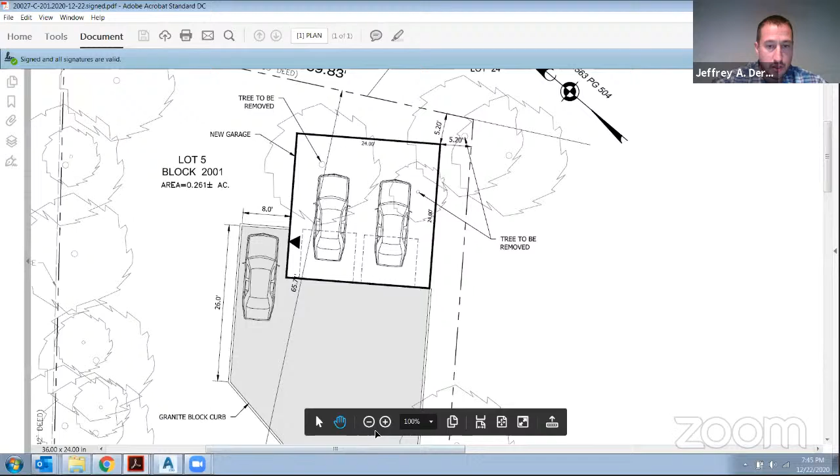Okay, please go ahead. Chris, do you want me to share my screen for the exhibits? Yeah, if you have them ready, go ahead. Okay, so we have, let me just - can everyone see that? Yeah. Okay, can you get started? Yeah, I clicked the button, it says I'm screen sharing, but I don't see. Do you see? Right now it's black. I see your cursor is moving, but that's it. Okay, so I have two exhibits. The first exhibit A1 is revised plans that address some of the board comments that were provided. Primarily I'll be speaking to two sheets, C201, which is sheet 2 of 3, and sheet 301, which is sheet 3 of 3. The first one's the layout plan, the second one's the grading plan, as well as photographs taken by me, put into a package. These were taken on November 2nd of this year. Okay, and is it okay to refer to Google Maps as well?

Yeah, if it's not marked, you'll have to send it. I mean, that's just on the internet. I could take a screenshot and send it.

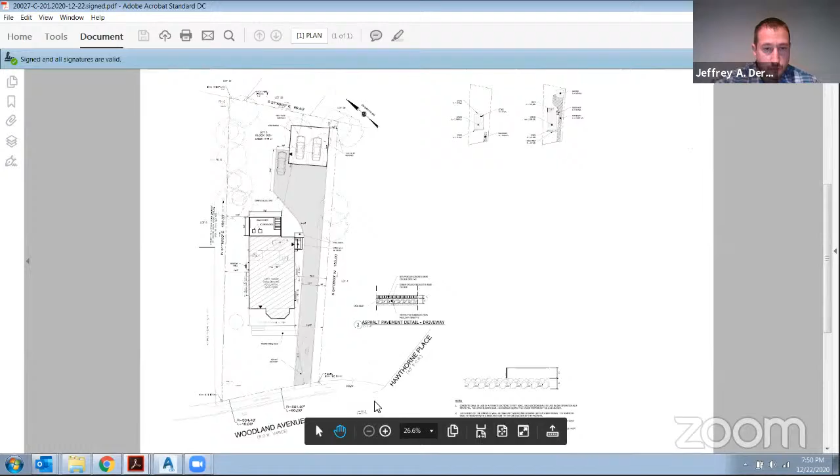We have a table of the zoning analysis up here to the right, which I'll refer to for some of the numbers, and look at the plan view. So the existing house is situated here. We're proposing to remove the stairway, which you can see right here, and the addition that's off the back of the house here.

To square up that house, there'll be an addition that comes off the back with a deck. There'll be an entrance that used to come here, it'll come out the side, with a new driveway down the right side of the house to a detached garage, consistent with some of the neighboring properties in this part of the community. For a lot that is narrow like this, there's no room to have a garage in the back, unless you were to tuck it in real close.

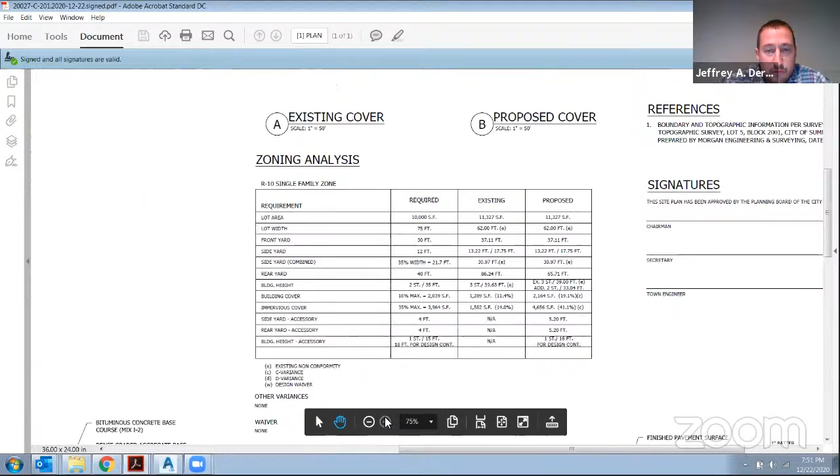The variances that we're looking for: the existing lot width is 62 feet, where 75 feet is required. The existing house structure is 39.63 feet tall from the average grade plane, where 35 feet is allowed.

We are actually going to modify the grading along the sides of the house. As the house gets longer, we're going to smooth out the driveway, and it's going to bring the average grade up. We're actually going to improve that condition by about 7.5 inches, so we're going to reduce the building height to 39 feet.

It should be noted that the addition is not a 3-story addition, it's only a 2-story addition. And the existing 3 stories is also an existing nonconformity, where 2 is allowed.

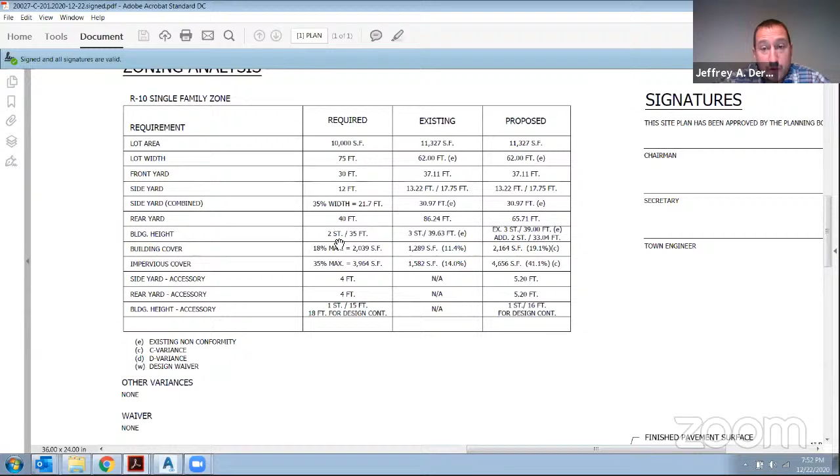The building cover and the impervious cover both have variances. The building cover, we are proposing 19.1%, where 18% is allowed. I'd like to point out that one of the comments from the zoning officer had a different number here - she included the deck.

The definition of building coverage in the ordinance states that all covered structures and structures with a roof are considered buildings. And after that, it says if a deck has a roof, it would be part of the building coverage. But in this case, the deck does not have a roof, so it's our opinion that the deck is not included as building coverage.

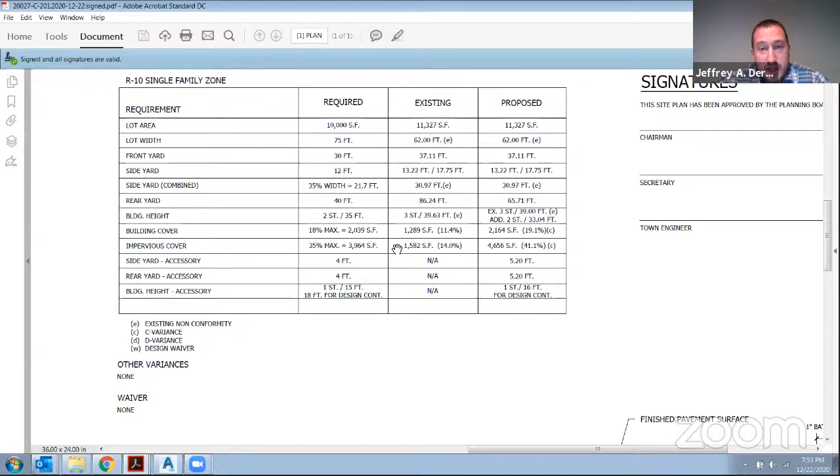The impervious coverage is 41.1%, where 35% is allowed. This is driven partly because of the turnaround requirements and the position of the garage.

So the garage is positioned in the back right corner. It meets the setbacks for accessory structures, and the driveway as it comes past the house is maintained at a minimum width of 10 feet, and then it flares out to allow access for the 2 cars into the garage.

Because the Zahn family has more than 2 cars, we anticipate there being a car parked in the driveway itself. So we provided an area where they could pull that car around the side of the garage and allow cars to turn around in this area. It's 32 feet from this edge to this edge, which is enough room to do a K-turn and be able to get the car out to the street so that you're pulling out face first.

At this point, I would like to go through the professional reports and touch on a few of the comments that were provided. I'll leave the plans up.

So we already talked about the variances. In the zoning officer's report, there was some different numbers presented than what we have here. There was a correction when the grade plane calculation was done - a spot shot that was typed wrong, and that threw the calculation off. So that's been corrected on this plan, and that's why the numbers I'm presenting and testifying to tonight are slightly different than what was in the report.

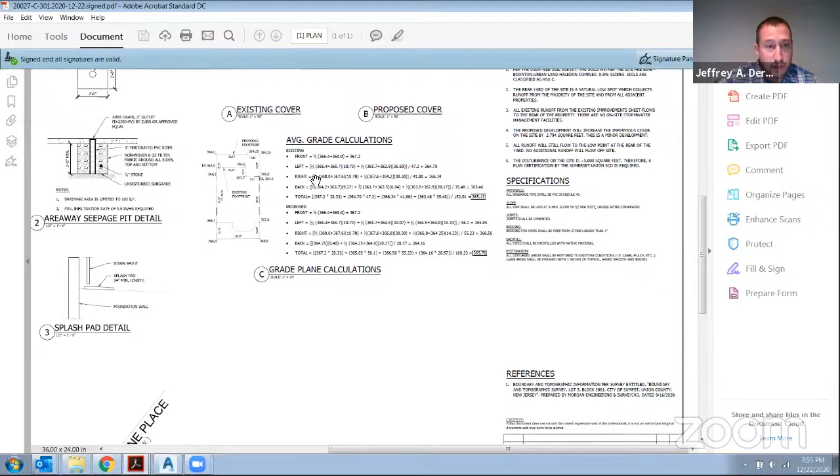These are the grade plane calculations that are here. I know there was a comment looking for them - they were on the plans. We've already talked about the coverages.

There was a comment on building height having a maximum of 40 feet. I could not find that in the code, so I would ask if the zoning officer could point us to that spot. If there's a variance for building height, it would be to the existing non-conforming ridge of the roof. The addition is well below the building height, and I'll let the architect show you the elevation and speak to that.

I believe a survey was provided in the package. So I think I'm on the engineer's comments right now, number 6. There was a comment regarding the neighbor's fence being 3 feet or 3.3 feet, which is 4 inches into the adjacent property, which is appropriate because it is the neighbor's fence.

Comment number 12 asked about a generator. My understanding is the owner does not intend to put a generator.

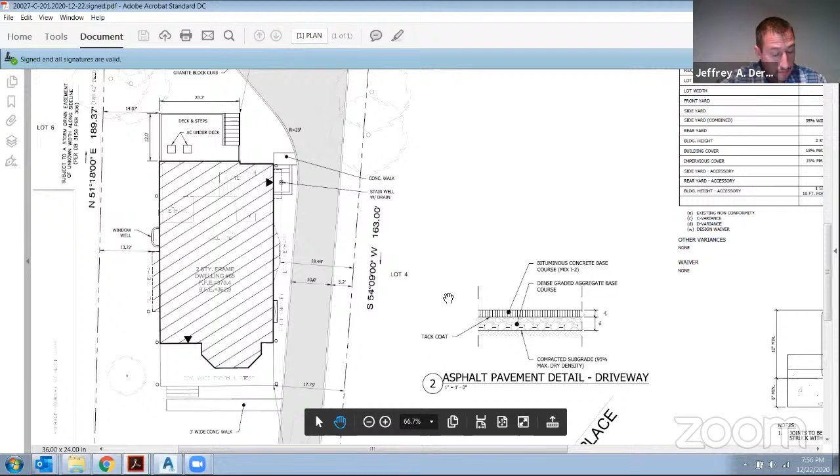Comment number 13 was discussing trees and any potential landscaping. We are going to be removing 2 trees, one in this location - this is a very small tree - and there's one on the corner here, and that's to make room for the garage.

I understand that if any trees over 16 inches would require a permit. I do believe an approval of a site plan would constitute a permit, but I'll let your attorney clarify that.

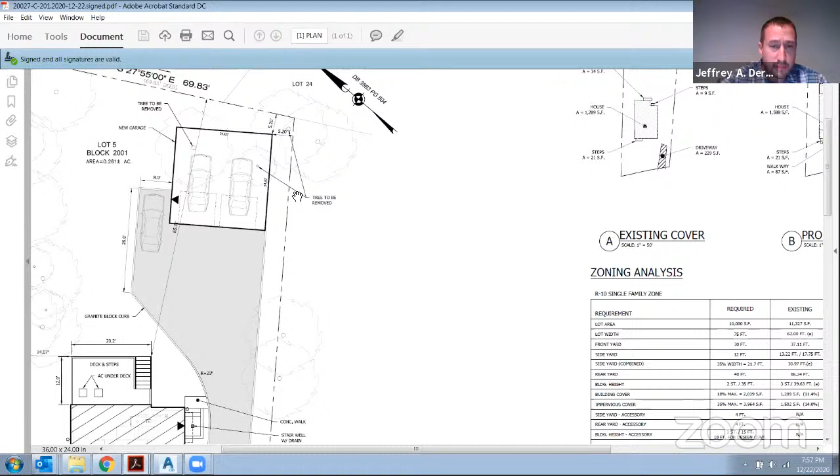The forester also provided some comments on landscaping. The owner does intend to provide landscaping at some point in the front and such. As far as any screening, the ordinance does not require screening from residential properties to residential.

Where the garage is, we're within 5 feet of the property line on this side, so putting screening there would just have trees that end up growing in and potentially damage the structure. They're also situated under an area with existing trees, so they probably wouldn't grow. I'm going to actually switch over back to a photograph.

The other discussion was on screening along the driveway. At this point, we don't intend to provide any. We feel it would enclose the property, and if you look through the neighborhood, there's a lot of instances where there's no screening. As I stated, the ordinance does not require screening residential to residential.

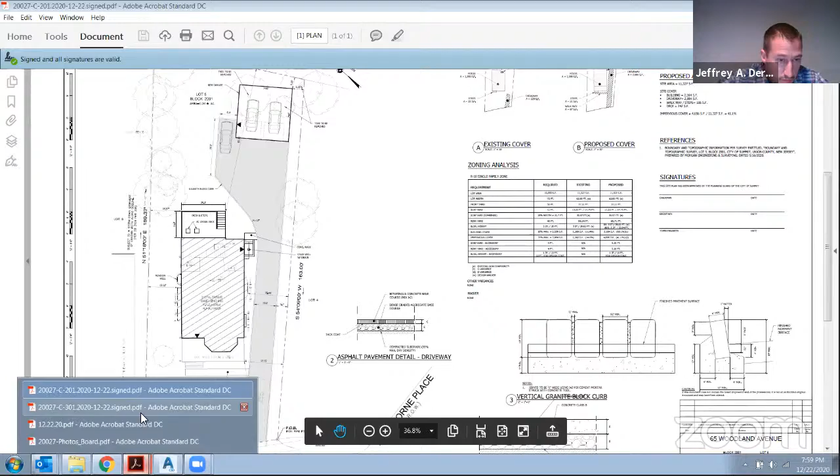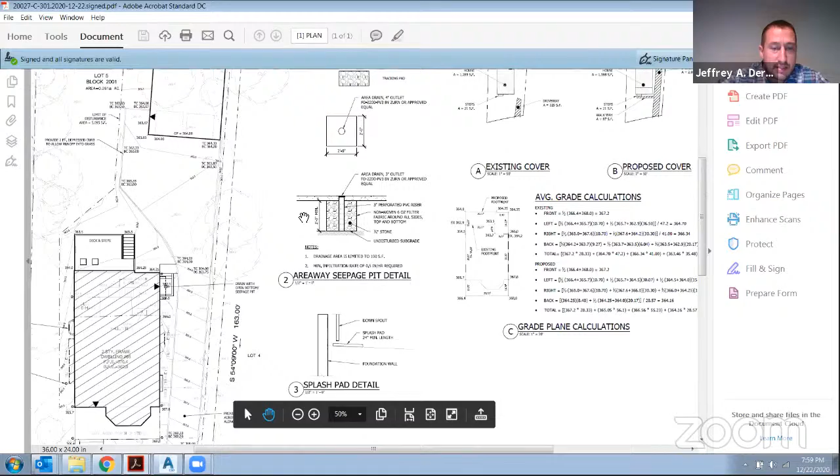On the grading plan, I've provided a stormwater management analysis over in this area. We are increasing the impervious cover on the lot by 2,794 square feet. And this property is unique in a sense because of the basin and the bowl that's basically formed by the backyard and the adjacent properties up around here.

So in the existing condition, roof runoff discharges from the roof leaders along the side here, and they're labeled as typical and shown on this plan. We intend to just maintain that existing pattern.

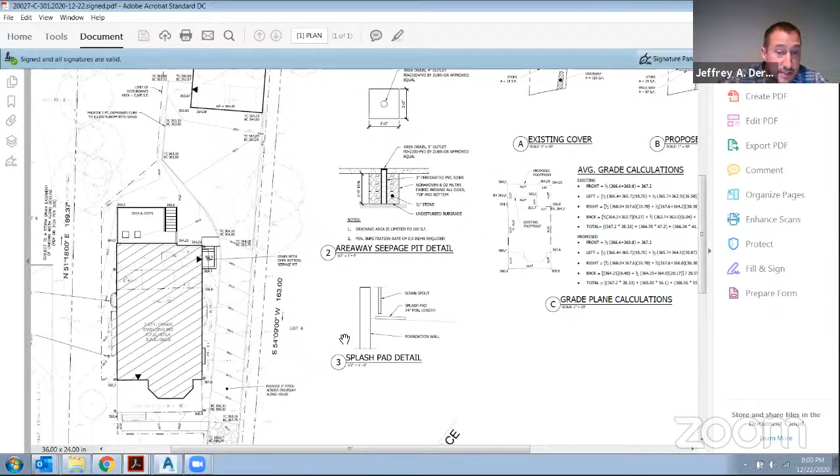The roof runoff is going to come down to the back. Here it's going to slope down to the driveway and work its way down to this low point in front of the garage, and then go out and work its way back into this area. Any runoff that comes down from the existing neighbor will work its way down along here and would be able to get directed around the back of the garage.

We've set the garage up a little bit above the existing grade. So in the existing condition, there's no runoff that actually leaves this property, and in the proposed condition, there's no runoff that actually leaves this property. Therefore, the design is in compliance with the standards.

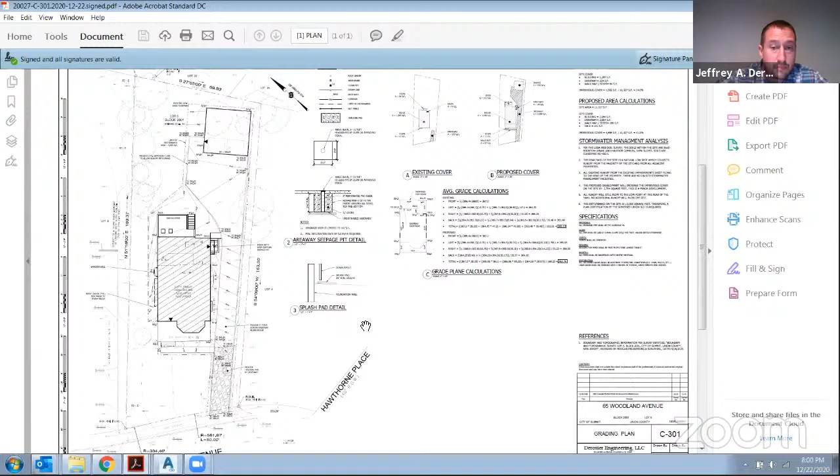I believe that concludes my testimony for now. Great, thank you. Mr. Ball, can you clarify the D6 variance? I know we had questions about that.

Yeah, I wanted to jump in on a couple things because there were a few points in the testimony. One was the definition of building area, building coverage, and whether that includes the deck. The definition under your DROs is that horizontal plan projection of all covered or roofed areas on a lot, whether permanent or temporary, including decks, and it goes on. It doesn't have to be covered and roofed. A deck would cover an area. So I think Krista's calculation, including that deck area within the building area, was the correct one.

If the board was going to be considering the variance here, we should use that increased building area number just to be sure it's entirely covered. As far as the height increase, there was an additional email today asking about that. The height of the addition is still more than 10%, so it triggers the D6 variance that would still be required, even though it's lower than the remainder of the house. It still would come in, and the board should again consider this as a D6 as to that aspect of the application. Thank you, Mr. Paul.

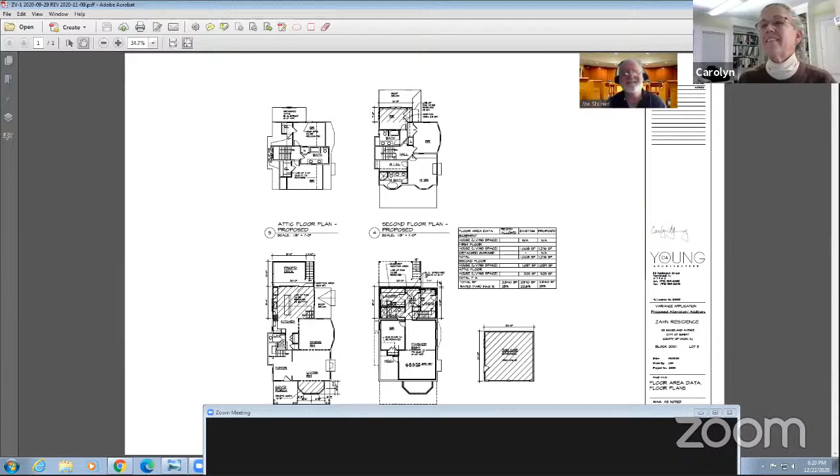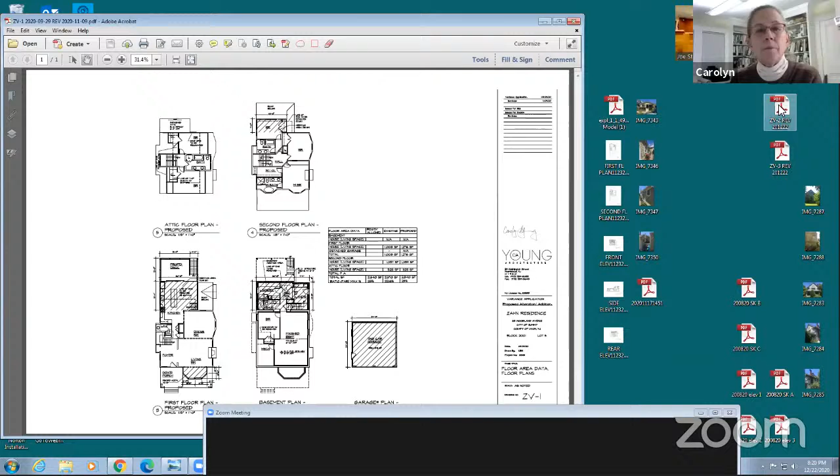There are three drawings that we have prepared: ZV1, ZV2, and ZV3. We're not seeing anything yet. Here we go. You see that now? You have a black screen in front of it. All right, hold on. Now you have me in front of that. I know. All right, move me over. That's it, a little further over to your left. To the other way, get in the middle there and then drag it. Okay, all right, there you go. ZV2, so we have it, and ZV3. Okay.

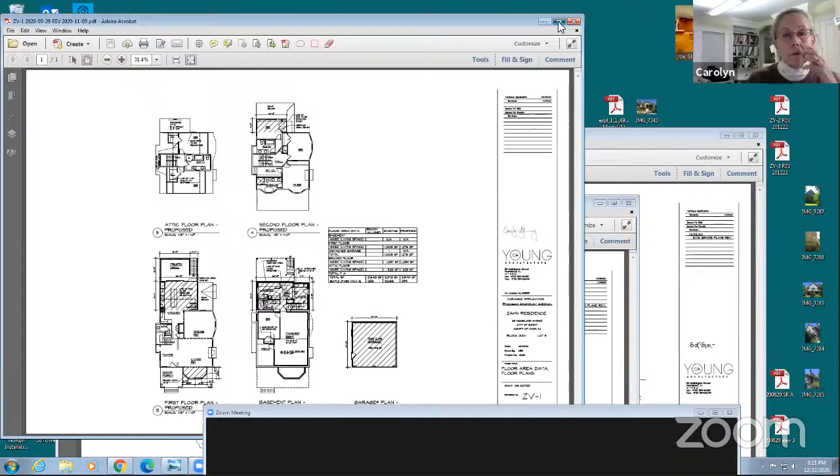So on ZV1, we are showing you the proposed plans. The hatched areas that you see are the proposed renovation, the proposed addition. We're actually removing an existing two-story addition that was done at some date to the back of the house, and we're constructing a new addition. It's comprised of a basement level, which is illustrated here, a first floor level, which is primarily kitchen and breakfast area, along with a bump out on the front of the house, which is under the covered porch.

On the second floor of the house, we're bumping out to the back in order to create a better bedroom and better bathroom configuration. We're doing other renovations as well, like creating a master bathroom.

You'll notice that the attic floor plan, which is the existing attic and the non-conforming third floor, shows we are not doing any additions to that level. Nothing is hatched, there's no addition. The two-story addition has roof on top to the back of the house, but it is not accessible space, it's below the height that would make it any kind of story. The only modification to the existing third floor is the relocation of a window, which is allowed in your ordinance as long as we're not adding windows.

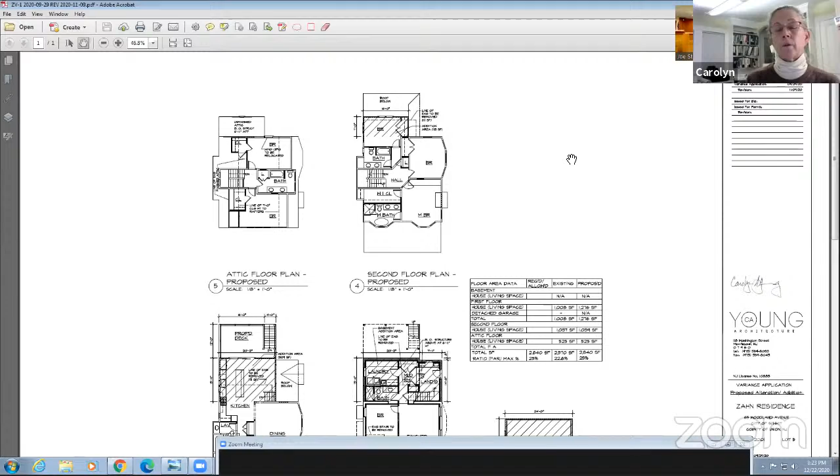So ZV2 — actually I'll go to ZV3 first. On ZV3, we also have some photographs at the top of the page, similar to ones you've seen so far, except taken earlier in the fall because the lawn was actually green.

We are talking about this existing house, which is 3 stories with the height of the ridge exceeding the 35-foot limit, at 39.63, which we keep talking about. That is existing, it is not changing. The back of the house, which we've also seen other images of, you can see the ridge of the house, which again is the existing condition.

You see this small bump out, which I referenced when we looked at the floor plans, that we're tearing off in order to add our addition. This third photo is similar to what Jeff showed because it's showing the right back corner of the property where we're proposing the detached garage.

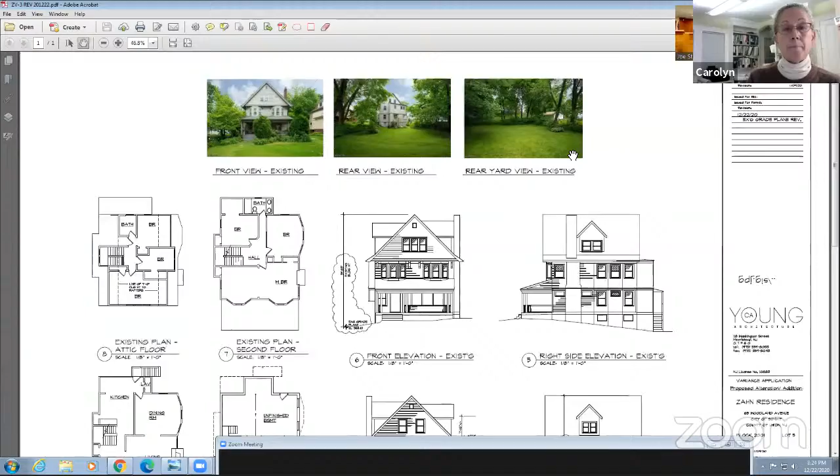The rest of this page shows the existing floor plans of the house and the existing elevations. The front elevation and rear elevation are graphics of what we just saw in photographs, along with the side elevations. This is illustrating the existing condition. The height we keep talking about is identified here on each drawing. I don't think I need to go through the existing floor plans, but they're there for reference and any questions you may have.

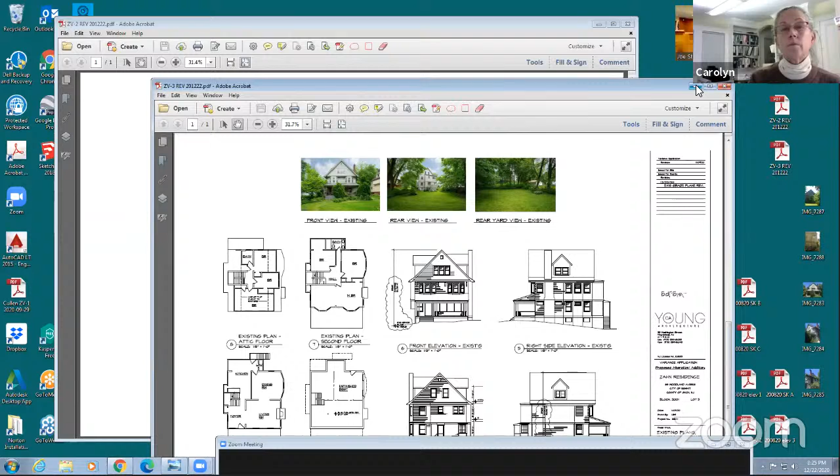So ZV2 is the drawing that discusses the proposed elevations of the house. Here we see the front elevation, and the bump out I discussed in plan to extend the size of the living room. Again, we see the front elevation with nothing else being changed or impacted. Obviously we're changing windows and updating elements of the house, but nothing architecturally is changing except for that bay, which is underneath the existing porch.

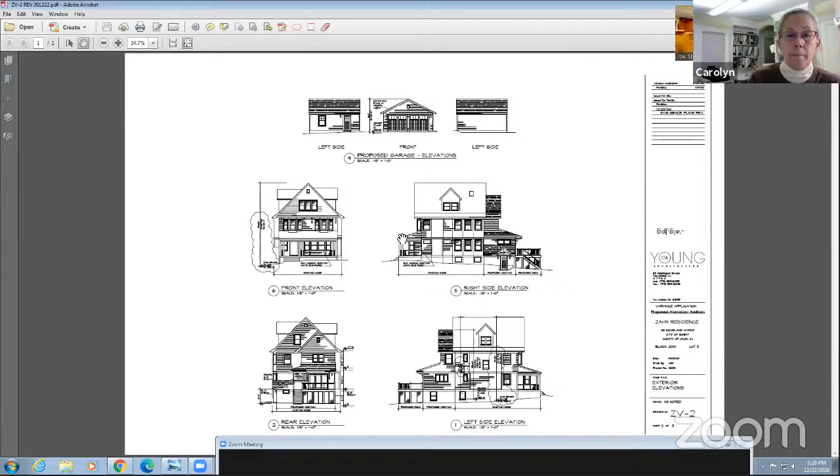I'll take us to this view because it's bigger. This is the right side of the house, where the driveway is going to be located, coming down the side of the house. This line is where the existing 3-story house ends, and this is our proposed addition, which is basement, 1st floor, 2nd floor with the roof. This is the deck to the rear.

The question that was just asked about the height of the deck — it's about 6 feet above the finished grade. We can discuss that in comments.

Here's the rear elevation of the house. The existing house is here beyond, and the addition is this area. We have the basement level, the deck here, the 1st floor, the 2nd floor, and the roof that covers the 2-story addition, which is not a 3rd floor or even usable attic space — it is just roof.

And this is the other side elevation. Once again, all the same comments apply. The end of the existing house, the heights indicated here, where the average height — let me zoom into this one for us.

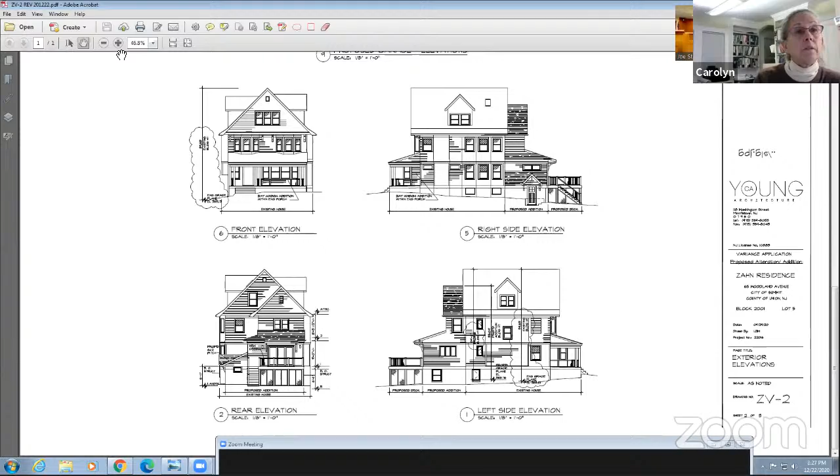The average grade currently is 365.13, which creates an existing building height of 39.63. The proposed average grade is 365.76, which creates a new proposed building height of the existing building only of 39 feet 0 inches. So we have an actual reduction in the existing 3-story house's overall height from 39.63 to 39 feet.

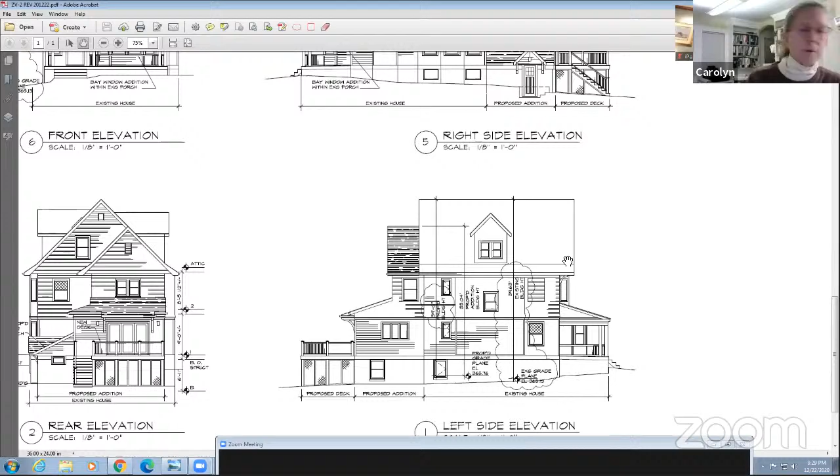The addition, which you see back here from the proposed average grade plane, will be 33.04 feet, which is less than 35 feet, and it does comply with the 35-foot height in your ordinance. I think there's been some confusion about that — not quite clear from what Mr. Ball said before, if that was his understanding or not.

I think that walks you through the drawings and hopefully identifies the design for you. There were some comments, not too many architectural comments in the review. We will be complying with smoke detectors, egress windows, and all those types of things that were in the reports. That will of course be done when we get to the construction drawings of the project.

I think, in summary, the design and the proposed improvements are beneficial and allow for this rather stately old home to continue to be part of the architectural fabric of downtown Summit.

What we are doing architecturally is trying to be sensitive to the original building, to improve the aesthetics, although most of it is happening to the back of the property. But for the homeowner's sake, we want to aesthetically improve it.

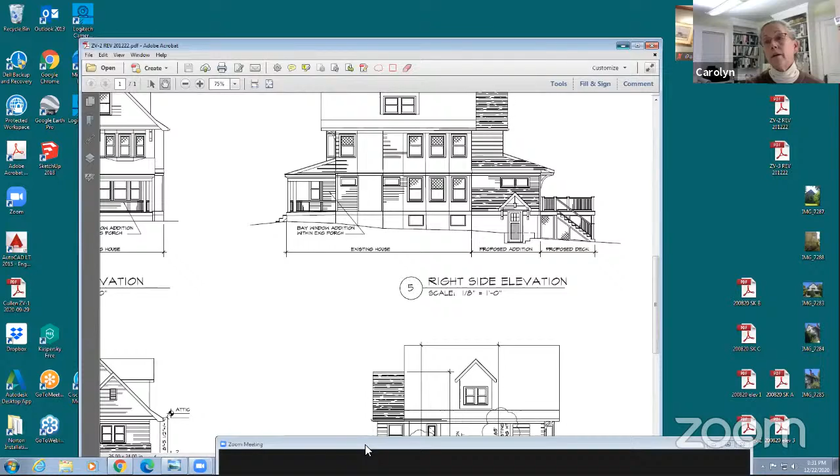So, I hope that worked. Thank you.

Are you complete? I'm complete. Okay, great. Any questions from the board? Give me a minute to get back to the group view. How do I do that? Oh, there you go. Okay. Thank you. You're welcome. Any questions from the board?

I'd like to jump in just so we could get clarification of the calculations for the height of this addition. I'm looking back at the notes from Krista, and at the communications from the engineer, and I want to be sure everyone's on the same page. Can you confirm what the existing grade plane elevation is, and the resulting building height of that particular addition?

Yes, I'm happy to try to clarify this, because it was a little confusing to all of us at first. And it's even a little more confusing because, as Jeff said, he had a number that got flipped around. So my drawings have bubbles on them.

I didn't really specify to that point, but I have bubbled what has been revised from the drawings that Krista saw. So, the existing house is 3 stories. The grade plane is calculated at 365.13 for the existing house.

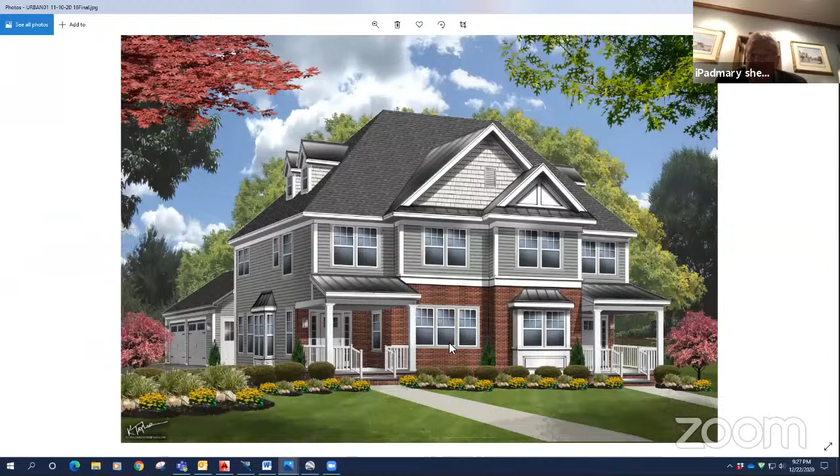Can you see my screen? Yes. Okay, so this is the unit. We did two renderings. This is the unit on the corner lot, which is lot 16.01. And then I also have the rendering for the lot, what's being called 17.01. And it's very similar to... I'm sorry, I just messed that up, didn't I? Let me go back. I got the same one. Nope, not that one.

I'm sorry, just give me one second to get the rendering up. Okay, I'm sorry. This is lot 17.01, and this will also be similar to lot 15.01, except it will be mirrored, a mirror image of this. So A7 is the rendering of lot 16.01, and A8 is the rendering of 17.01, so we keep the evidence straight, correct? Mr. Szymczak? Yes, that's correct.

All right, Mr. Alberti, let's go back to your question. Did you commission a rendered elevation of the proposed lot 16, the corner lot, for presentation this evening? And I'll add lot 17, proposed lot 17.01, and ask whether these are the renderings of the buildings you are seeking approval to construct. Yes, sir. These are the renderings that were coordinated with our architect of record and were approved by us as ownership as our intended development.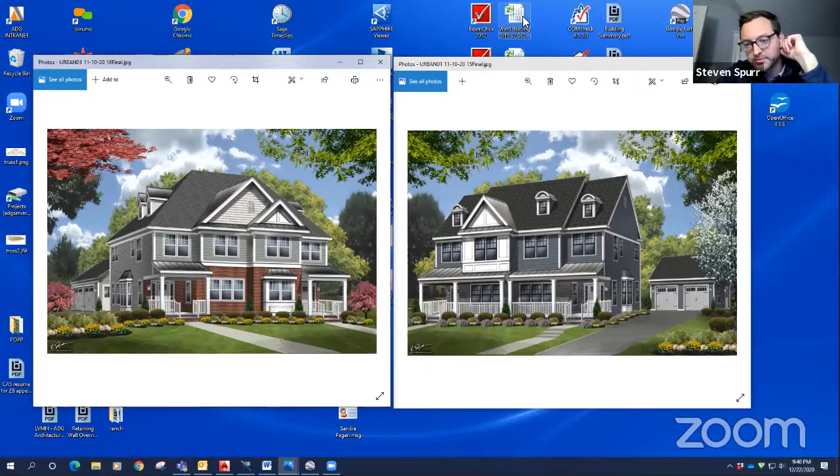Thank you, Mr. Sheehan. First, any questions from our board professionals, Mr. Dower, Mr. Snickes, understanding this is not necessarily a professional witness, but a representative of ownership? I have no questions at this time.

Chairman, Ed Snickes from Burgess. Can you hear me okay? Yes, I can hear you. Okay, thank you, I just wanted two quick questions. One, I didn't hear, I'm sorry, if you were going to change the roof line as Krista Anderson had identified. Yes, sir, we can meet the 6-on-12 standard that she had proposed in her review.

Okay. And then also, with regard to the building sizes themselves, you may have identified your process in identifying the actual units and their sizes. And I noted that you have separate detached garages, and I know that's been identified as some of the driver for the impervious coverage. What was your rationale for that compared to attached to the buildings?

Yes, so when we were first looking at the development, we initially thought about having the garage attached to the dwelling and even be something where you drive in and are partially below grade, incorporated in somewhat of a basement plan. But we realized that it took away a lot of the living space, and so much of life now is confined to your home that we wanted to maximize that living space and also have the garage as much as possible tucked behind the property so it wasn't a prominent feature for a vehicle, as much as it was celebrating the new homes people will be moving into.

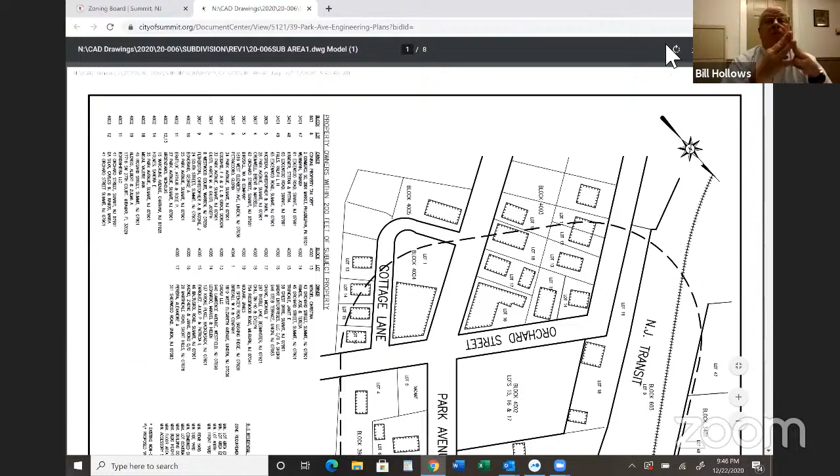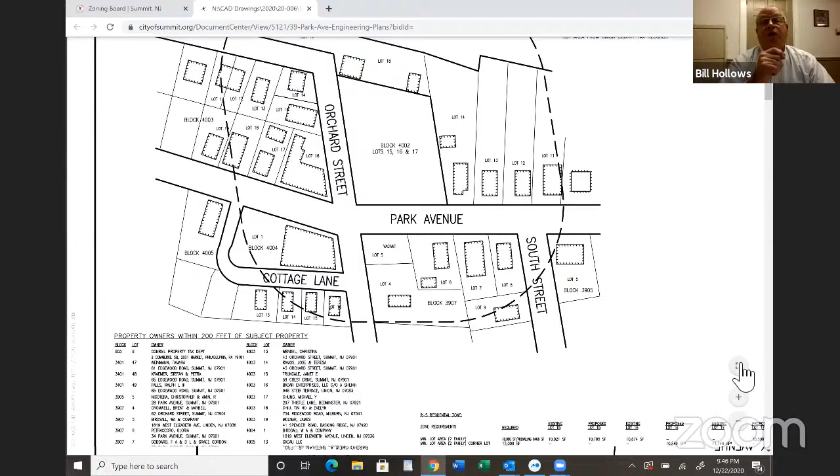There we go. Just kind of the background, the property is located at the corner of Park Avenue and Orchard Street. It consists of 3 lots, presently 15, 16, and 17. We don't show them on this area map, but I have an exhibit where you can see those. Presently, the lot is vacant, but previous to when we did the survey in the spring, there were structures on there, and I have an exhibit to show that. But I just want to give you kind of an overview of where you are.

So the top of the drawing is the NJ Transit Railroad. To the right of the subject property is a residential area, and both sides of Park Avenue, a residential area with a mix of single-family homes and multifamily homes, and I would say there's probably more multifamily homes than single-family homes there. Some of the lots have garages in the back, some have driveways that go to the back but no garage. I don't recall, the lot directly across from us has a garage that faces Park Avenue, but again, it's behind the house. I don't recall any of the homes that have attached garages.

When we go to the left of this drawing, we get into a mix of residential and commercial properties. You've got a deli on the corner of Orchard and Park. Next to that's a Domino's Pizza and a laundromat. Both of those buildings appear to have apartments above on the second floor.

When you go a little bit more to the left, you got more residential homes. If you go on Orchard Street, which is one way towards the top of the drawing, and when you make the turn, you go towards Roosevelt School, it's all residential, again a combination of single family homes and multifamily homes. Some are duplexes or doubles, and some of them are multifamily. I think I saw one that was 4. And diagonally across the street is the vacant plumbing building with a parking lot.

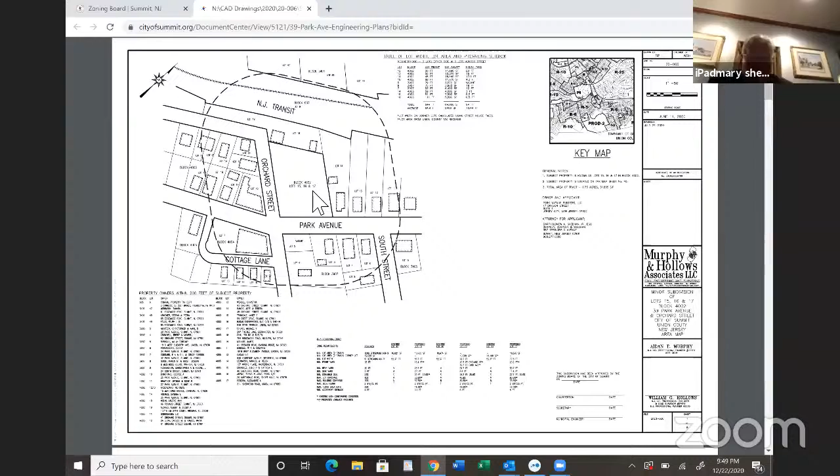All right. Why don't you describe the condition of the property that you observed and then take us through the subdivision, please? Sure. Chris, if you could call up the exhibit A4, it's a rendered drawing of the 3 lots as they sit out there today, represented by 3 lots today.

When we surveyed this property back in the spring of 2020, there was on the property a 2.5-story single family structure, a large driveway that comes in and goes behind the property, a brick patio, a shed. There were remains of a greenhouse towards the middle of the property, and then a couple more patios sitting out more in the middle of the property. There were some scattered trees in the middle of the property. There are trees along Orchard Street. There's bamboo along Park Avenue. And there's a little opening at the adjacent lot, which I believe is 14, towards the top of the drawing. There's a little opening there, and then you get back into some more bamboo.

And today, if you were to drive out there, the property is vacant. All the trees in the middle of the property are gone. The trees along the perimeter and the bamboo remain. That's really, if you've been out there to the site, I just wanted to make sure you knew that at one time there was a considerable amount of impervious coverage on this site, and it was improved.

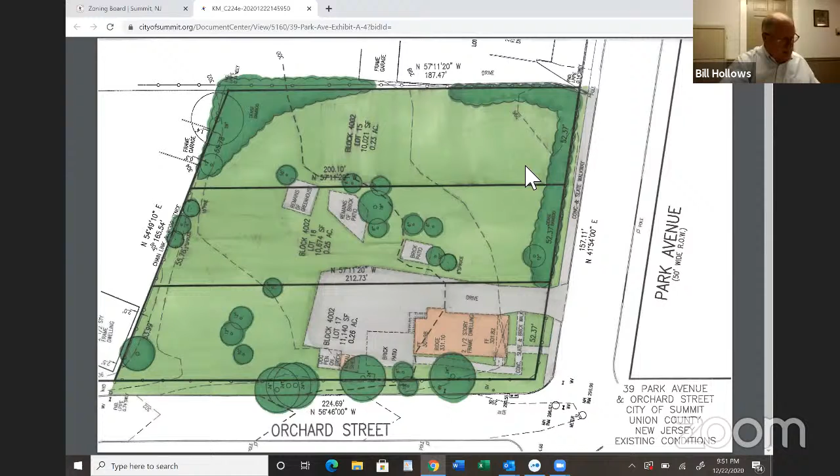I think if we can go to my exhibit A3, that's the proposed subdivision.

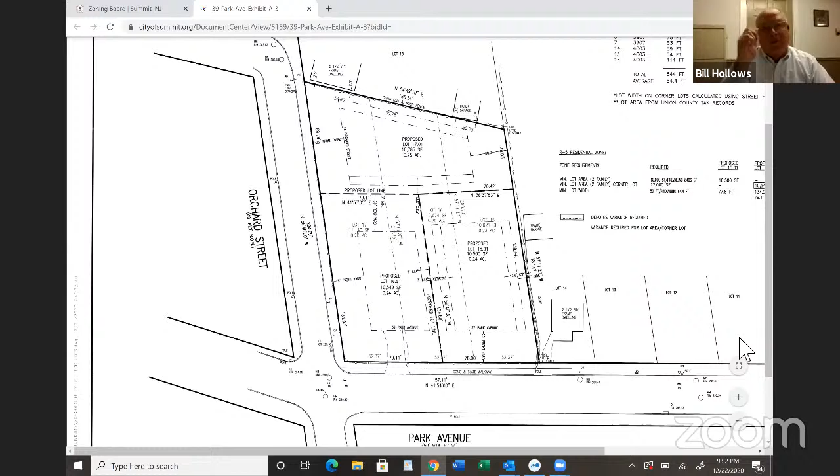And technically it's a subdivision. Realistically, it's a lot line adjustment. We're just realigning the three lots to make a better building envelope. The present three lots are narrow, about 50 feet wide, and go from Park Avenue to the back of the property with a very narrow building envelope. We thought readjusting these lot lines made a lot more sense.

On top of that drawing is also the table of lot width, prevailing setbacks, and prevailing lot areas. It took into account 10 lots: the three to the right of our subject property, the three across the street, the three on Park Avenue, three across the street on Orchard Street, and the adjoining lot on Orchard Street at the top of the drawing. The average lot area came out to 8,406 square feet, the average lot width is 64.4 feet, and the average front yard setback was 10.44 feet.

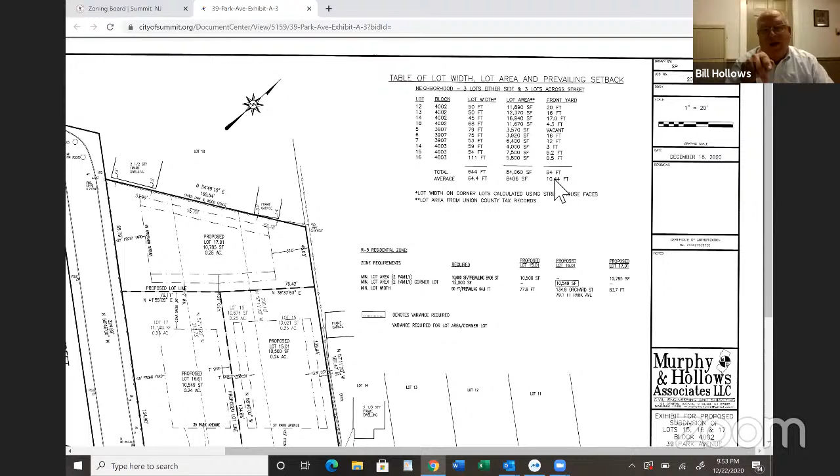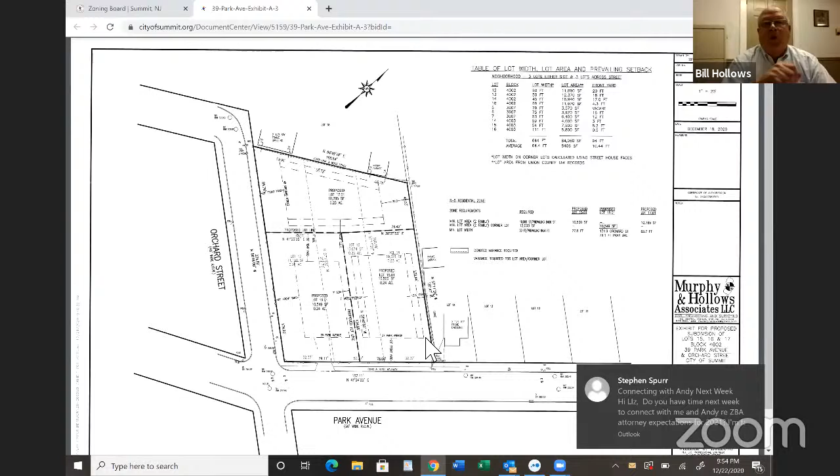It's the variance that we were requesting. The lot width on Orchard Street is 134.9 feet, and on Park Avenue it's 79.1. We're already exceeding the average, or the prevailing, for the neighborhood. Lot 17.01 is the interior lot on Orchard Street, and that would have 10,785 square feet with a lot width of 83.7. That lot is not as rectangular as I would like, because the lot line pinches into the back. The lot width at the street is a lot wider than it is in the back.

Mr. Hollows, let's stop you right there and ask you to once again call out the lot numbers of the proposed lots, to see if the board members have any question or uncertainty about that, based on the fact that the filing contained a different sequence of lots.

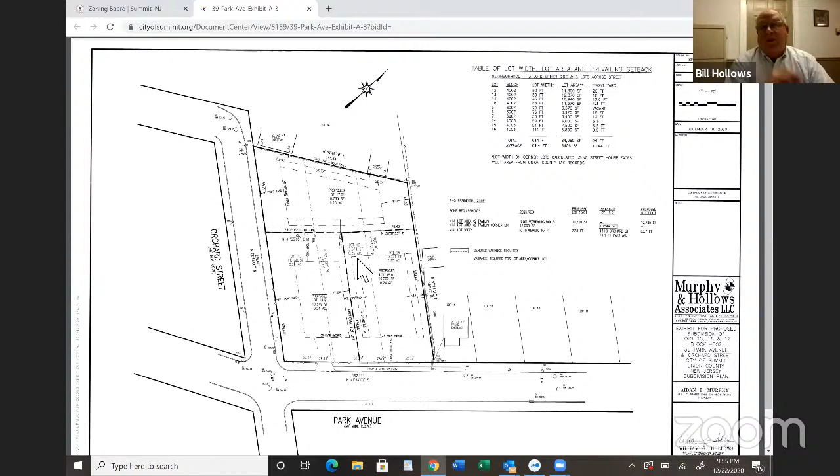The interior lot on Park Avenue is 15.01. The corner lot is 16.01, and it always was 16. The interior lot on Orchard Street is 17.01. So the Orchard Street lot and the interior lot on Park Avenue have been flipped. The interior lot on Park is 15.01 now, and the interior lot on Orchard is 17.01. And that sequence runs in order, running west on Park Avenue, correct?

It does. Now, Mr. Chairman, at this point in Mr. Hollows' presentation, we would be going over each of the lots with a reflection on each one of the dimensional standards that apply to the lot and require variance relief. It will take at least 30 to 45 minutes to get through this testimony. I'm going to suggest an evaluation as to how the board wants to deploy the time available, and make a judgment and give instructions, which we will follow.

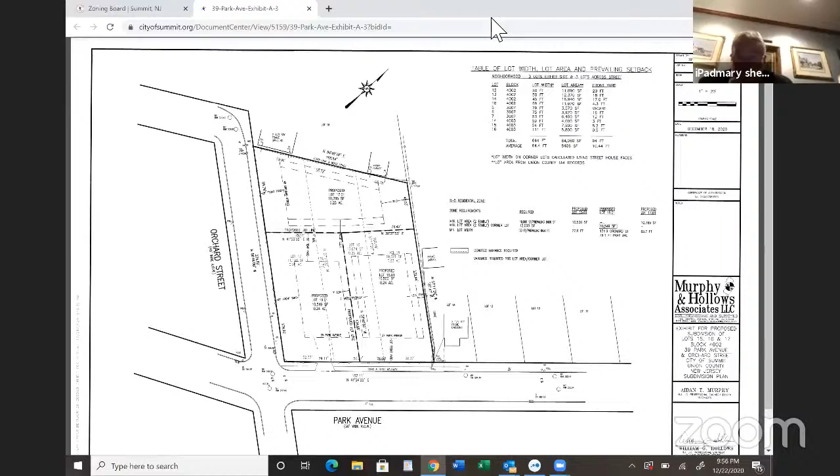Well, if there ever was such a thing as a cliffhanger, I think this would be it. So what I would recommend is we conclude Mr. Hollows' testimony for this evening, and with your consent, carry this case. Chris, I believe we discussed the next available session would be February 17th, 2021. Yeah, we have a lot on the upcoming agendas.

Bart, how much time would you say you need to complete an entire hearing for this? I would say maybe 2 hours, 2.5 hours. Okay, so you need your own agenda. So the 17th is the best case for you. 2/17? Yeah, should be a Wednesday. Okay.

All right, thank you, Mr. Chairman and members of the board. We'll return on the 17th of February and pick up Bill Hollows' testimony, hear from the architect and the planner, and respond to any concerns or questions from the board or members of the interested public. Are you waiving time as well, Bart, for the board to act?

Yes, and it will be carried without further notice. Thank you, Mr. Nicola. If the board wants to... I can't make that call. Yes, well, thank you very much, Chris. Thank you, Mr. Sheehan. We'll carry then until February 17th.